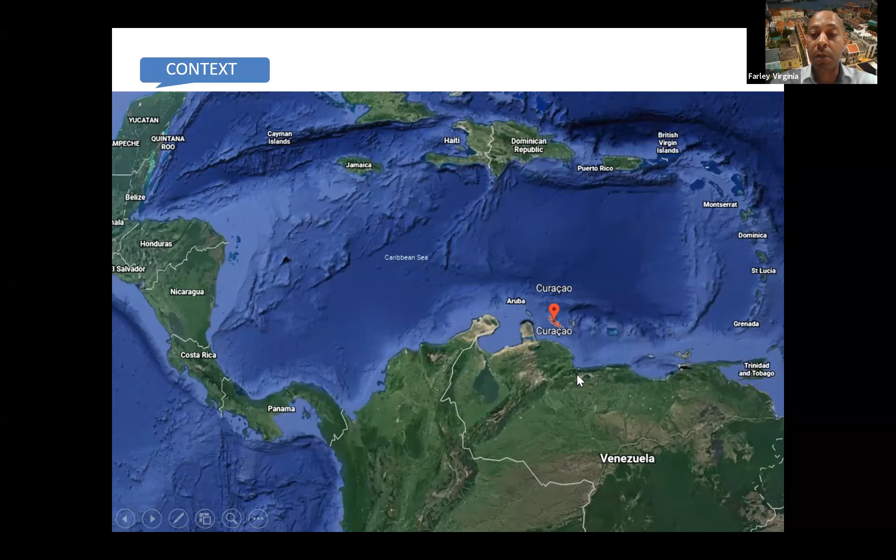Curacao is located north of Venezuela, with our neighbor islands Aruba and Bonaire on the other side. If you look at the Zakito area, it's located at the south part of Curacao. Like I said, you have Otrobanda, and you have Punda, the downtown area of Curacao, so it's adjacent to the downtown area.

This picture you saw before is a combination of real estate development with natural areas like the mangrove parks and lagoons, but it's also an area with a lot of history. One of the main events that happened here is that one of the local heroes of Curacao, called Tula, according to the history books, was murdered, and his remains were thrown into the water at this site. You have statues here too. So it is a very important historic event that took place, and that has a lot of value within the context of this area.

One other important part is the middle of the area, where you have the Aqualectra site. Aqualectra is our water and electricity company. Last Friday they gave a presentation about their ideas for the future, it's going to be very green, with a lot of renewable energy techniques incorporated. They are doing it already, so that's something we're going to incorporate within the development too. But at this moment, they are dismantling this water plant, and they're going to move to other areas within Curacao.

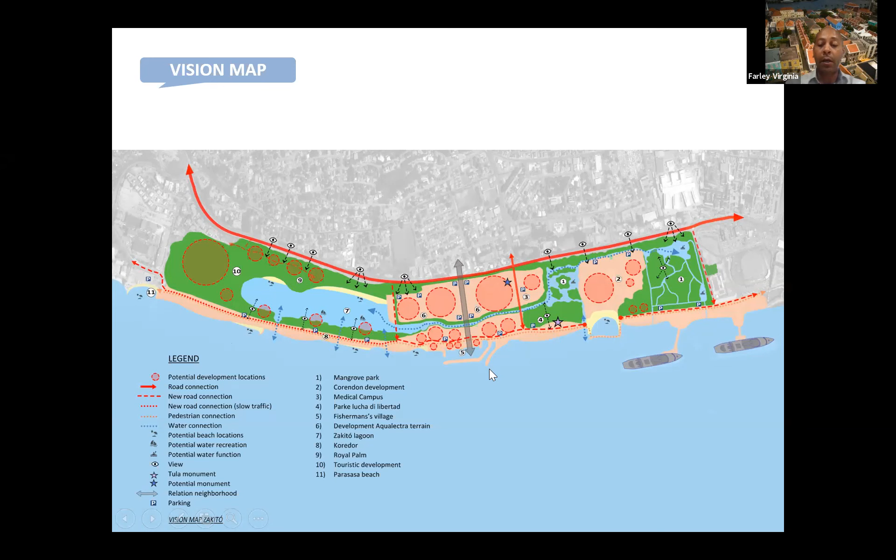Also creating connections between the site here where you have urban development already, but we need a connection with this area. And very important, we would like to have a connection all the way through all the different areas, connecting it to all the existing urban developments already.

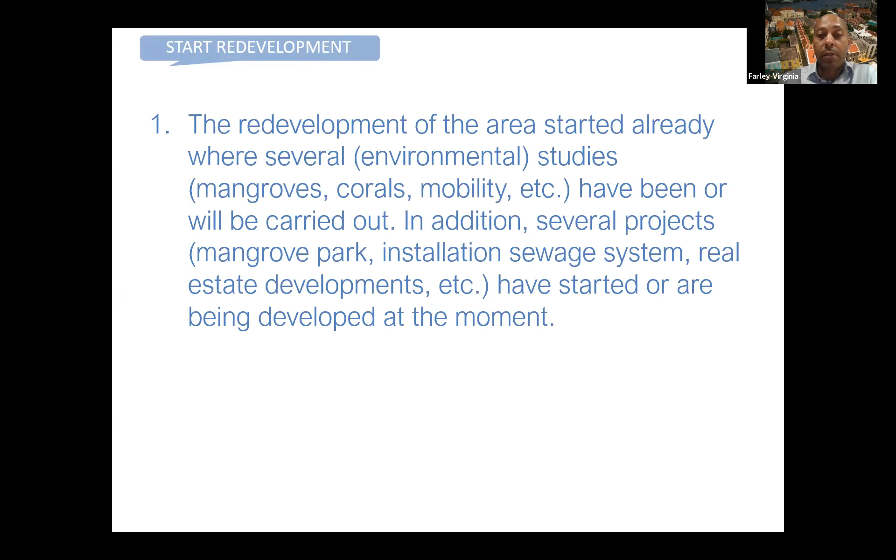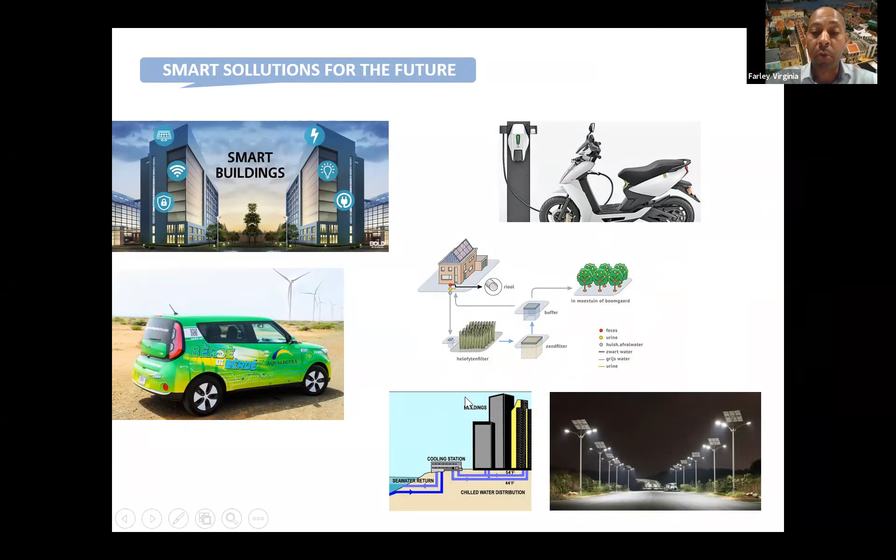This is a site, for instance, where Aqualectra is based now, which is going to be a high density development with smart solutions, recollecting our water and using it for plants. I told you guys already about the cooling of the buildings using water.

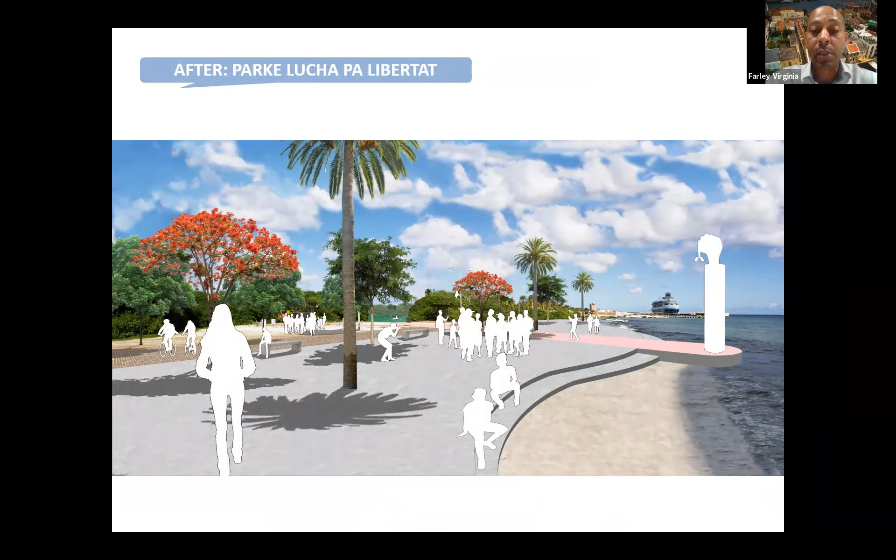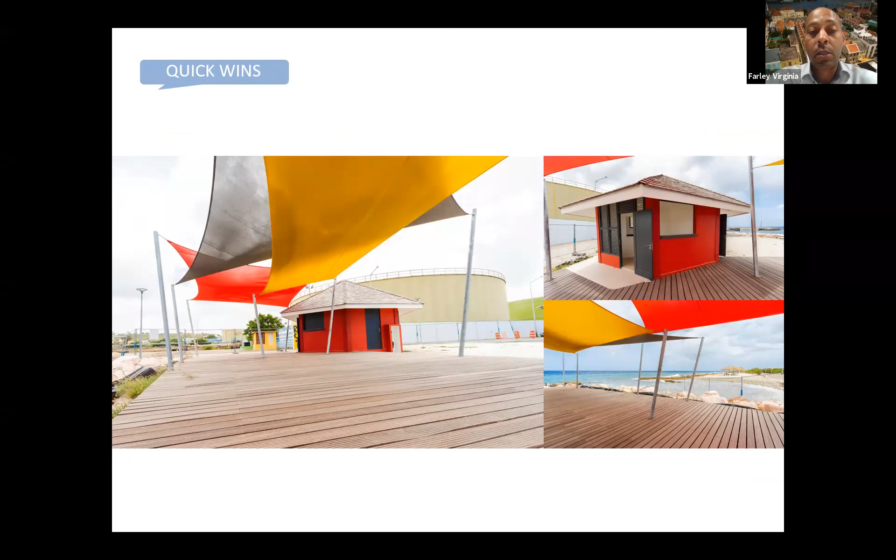Redevelopment of the area where the local hero statue is placed. Fisherman's Village redevelopment also. These are some of the quick win buildings that were there. We redeveloped them.

Aqualectra also installed smart lighting, LED lighting in the areas, like a pilot. And we are working now together with a local plastic recycling company to come up with a pilot for waste bins, where also the different materials can be separated.

This was a presentation.

Yes, indeed. Thank you very much, Farley. You showed indeed a natural area with some development possibilities, and of course we have some challenges in how we can make it as sustainable as possible, but there are a lot of opportunities as you showed. So we are really committed to develop it that way.

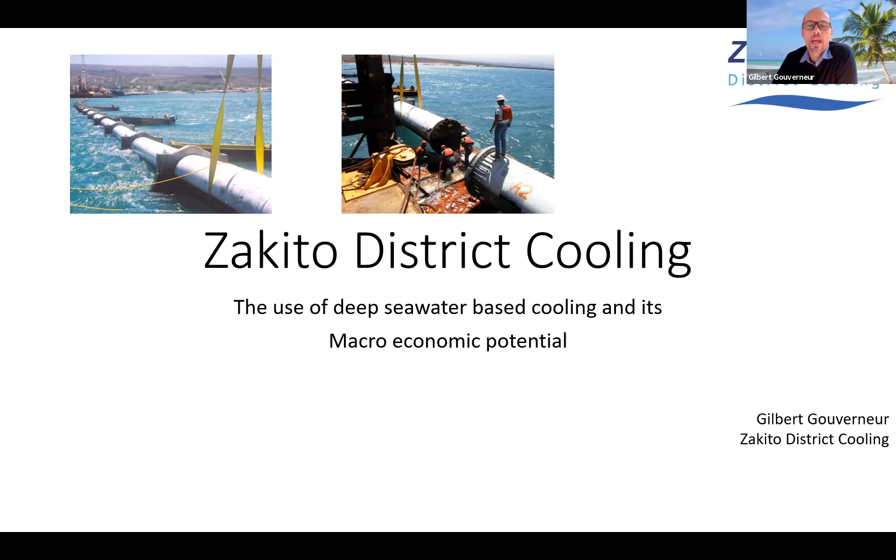Zakitó district cooling is a district cooling system. The basics of that is you produce cooling for buildings in a centralized location and distribute it with a closed pipeline loop. The sources of cooling can be various. It can be conventional cooling systems, rivers, waste heat, but it can also be the ocean, in our case on Curacao and many islands, which we have plentiful of.

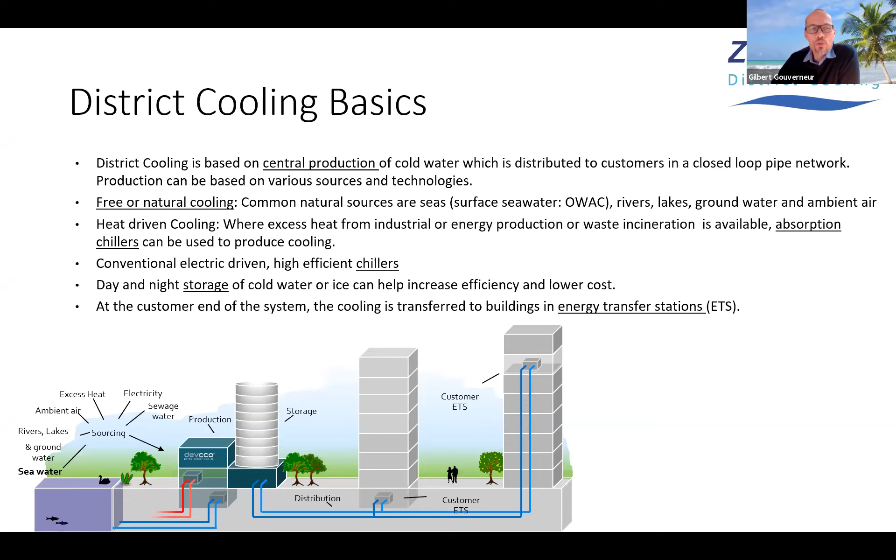And the ocean - you can use the surface water, as our colleague Tony van Sprang will explain with regard to OTEC, but you can also use the deeper sea water for cooling purposes. What we as Zakito Cooling have done is develop a system that looks at the different types of cooling sources available and uses that to optimize a system for the area.

Zulaika also went into the need for us to go green, to be more sustainable, to reduce our pollution and our footprint worldwide. District cooling can contribute to that. Worldwide, it could contribute to a large portion, because 20% of the electricity used in buildings is for cooling, and that's about 10% of the total energy use in the world. So cooling is very important, and for us to cool in a sustainable manner will be very important.

Furthermore, what you see worldwide is that because we're switching to many electrical appliances to substitute fossil fuels, grid capacity becomes a bottleneck, which we have to be very creative with. The result and the solution for that is the use of almost all sustainable and renewable energy sources and solutions there are to mitigate this CO2 problem that we have.

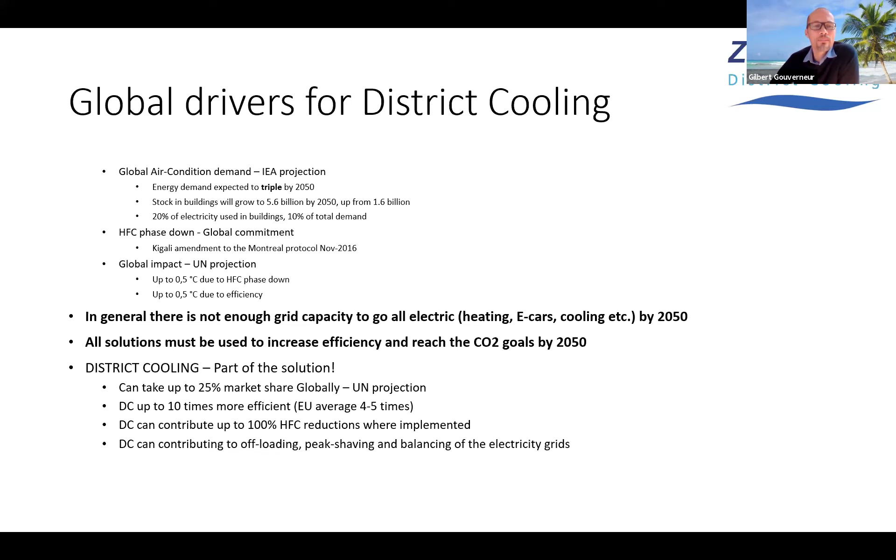Characteristic of deep sea water, of course, is that it's very deep, about 850 meters deep. The water there comes with the ocean currents from the North Pole, through the Atlantic, all the way to Hawaii, taking about 2,000 years to reach Hawaii, and another 2,000 years to get back to the North Pole. The water at this depth is about 5 degrees. It has a lot of nutrients, and it's very sterile. Because of that, besides cooling, it has a very interesting potential for other purposes.

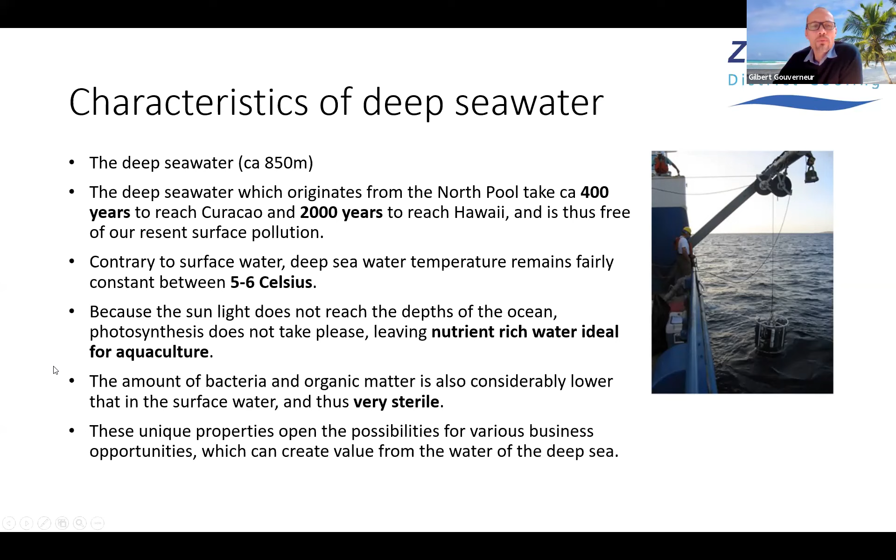Now I'm going to show you guys a short film. One second, how does this work?

How can I? Is everything okay? I need to get out of the presentation for a second. Stop sharing. Yes, I don't have that button. Above, you can see that you can stop the share. Ah, okay, yes, thank you.

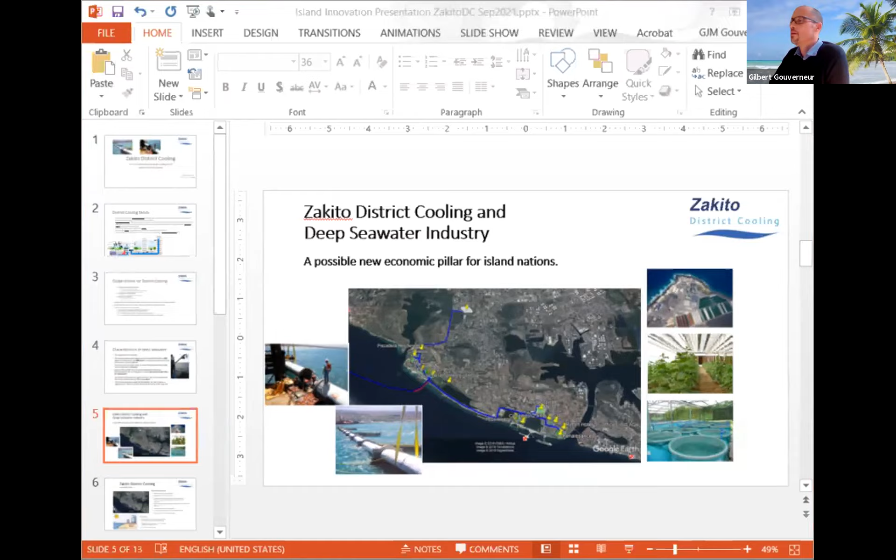Curaçao Wegenbouw Maatschappij, EcoPower International, Deerns Netherlands, Civil Engineering Caribbean, and Devcco Sweden have set up a cooperation to develop the Zakito.

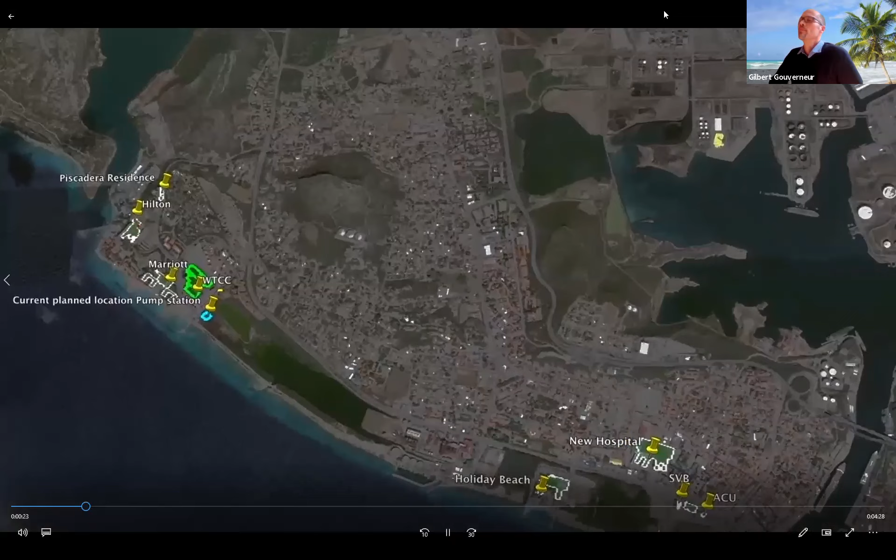There's no volume anymore, is it? Cooling system, and thus provide all the customers with a sustainable, reliable, and cheaper means for cooling their buildings.

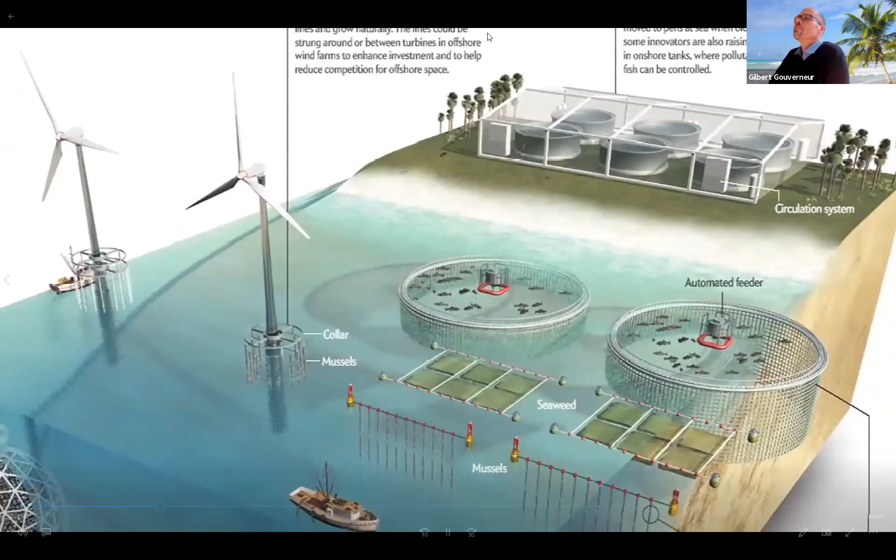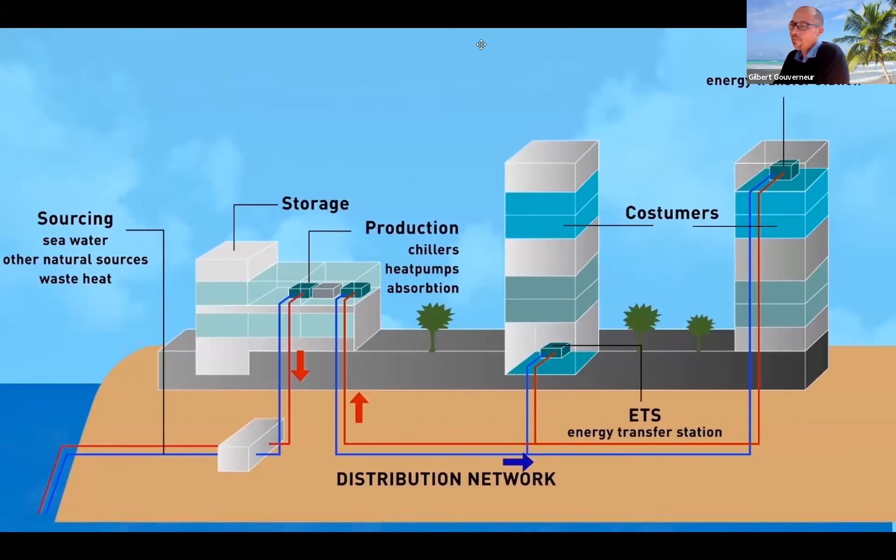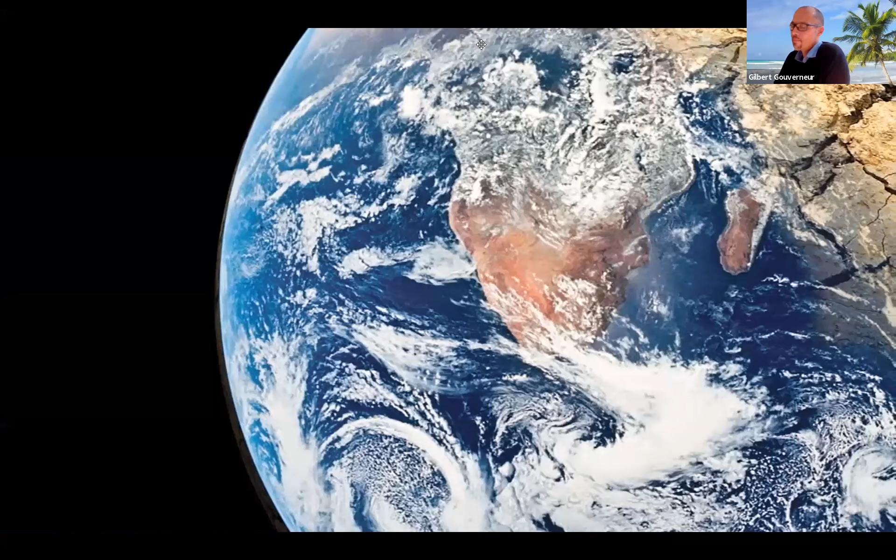Another benefit of the Zakito district cooling installation is the opportunity to use the returned seawater for a deep seawater industry, a possible new economic pillar for Curaçao. The Zakito district cooling system and the subsequent potential for a deep seawater industry can be seen as an insurance for our future energy and food supply, now and for generations to come. Because of climate change, more of the larger countries will have to deal with drier areas and longer periods of drought. The next world crisis will be the food crisis.

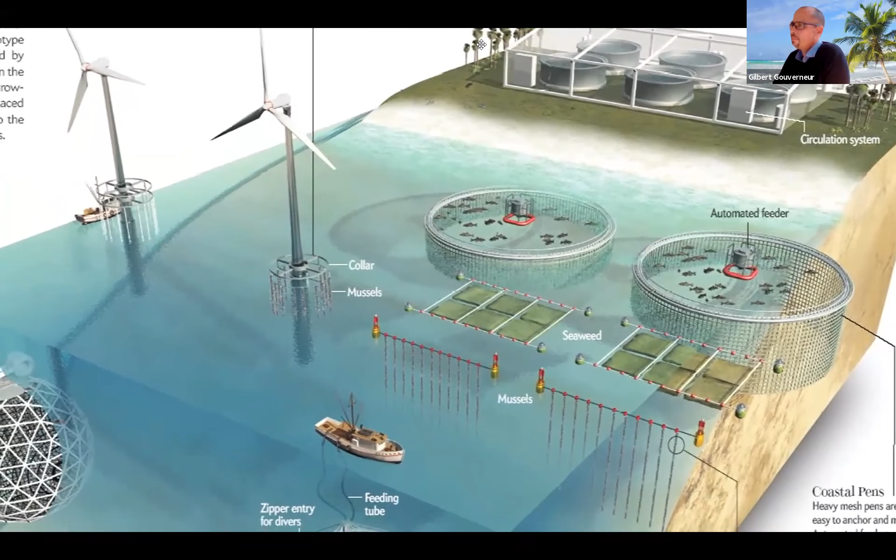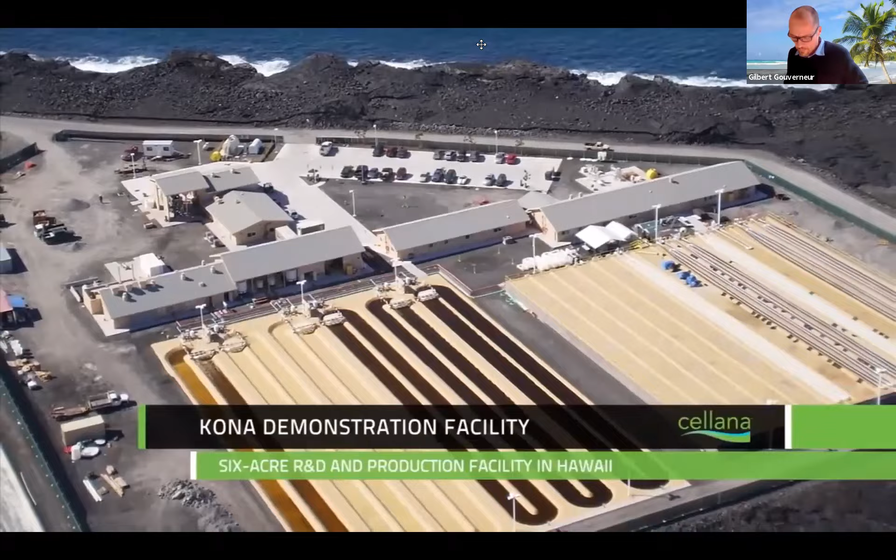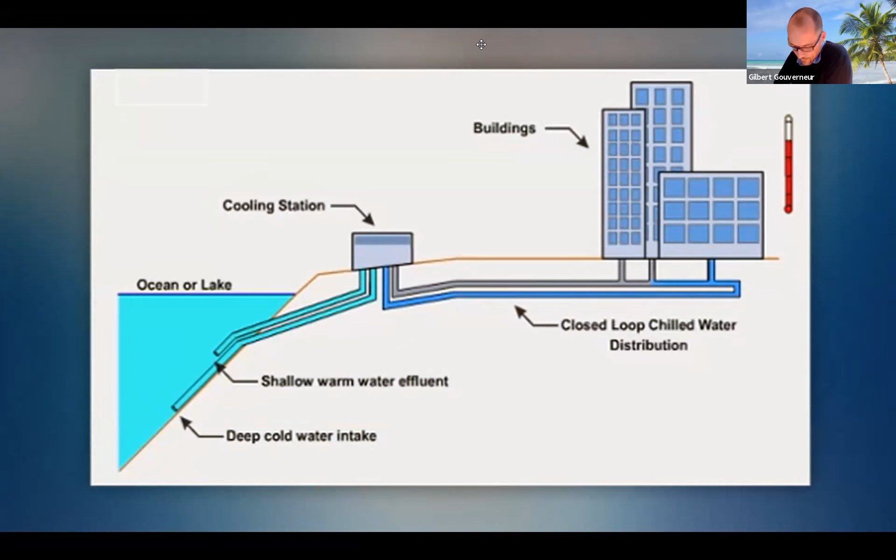Besides for cooling, another way of using the cold seawater from the bottom of the ocean is for activities in a deep seawater industry such as agriculture and aquaculture. Locations where this is being done include Nelha, Hawaii, Japan, Korea, Taiwan, India, and Bora Bora. After the water has been used for cooling buildings, it will still have a temperature of approximately 12 degrees Celsius, which is still cold enough for agricultural or aquacultural use.

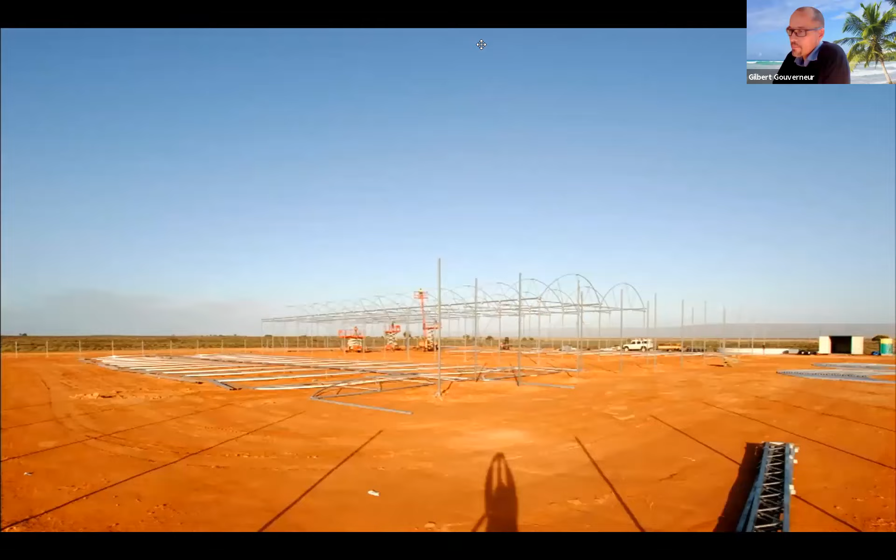A system you could think of using is similar to the Dutch greenhouse system. But instead of heating them, as is done in the Netherlands, here in the Caribbean we would have to cool the greenhouses. An additional side effect of cooling greenhouses in the humid Caribbean climate is free water due to condensation. Fish farming is also made more feasible with this deep seawater because at great depths the seawater is rich in nutrients and sterile, thus free of viruses and bacteria. With this system, we could start producing vegetables, fruits, and fish that cannot be produced in this region at the moment.

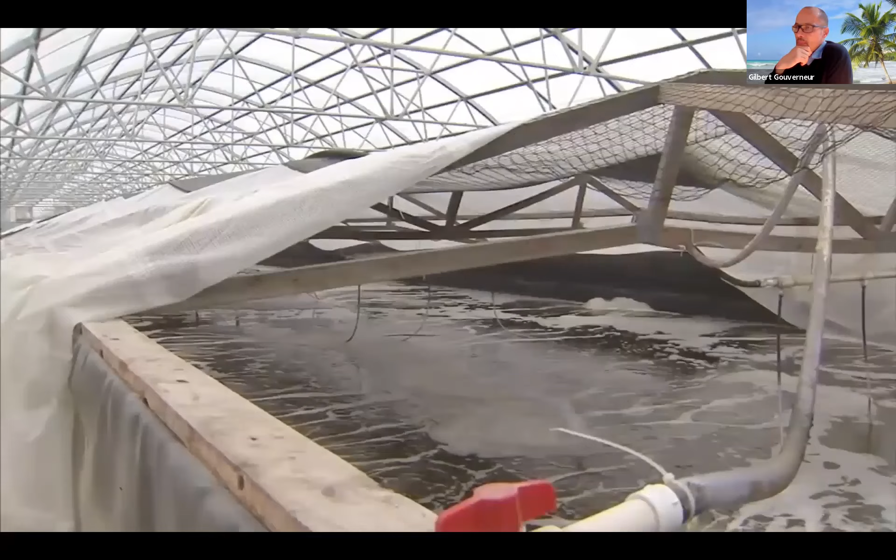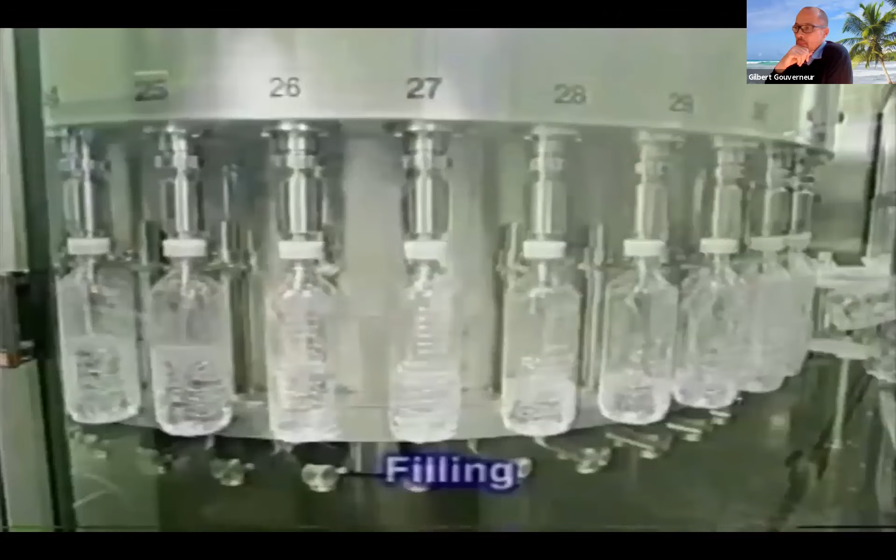We visited Nelha, Hawaii to have a look at their blooming deep seawater industry that has been running for more than 20 years. For instance, there is a shrimp farm that uses deep seawater, sterile and full of nutrition, to produce shrimp that are disease-free for the shrimp industry. There is also a company that takes deep seawater to produce drinking water and bottles it for the Asian market. In Asia, there is a very large market for this centuries-old water, because it has great spiritual value for them. This industry has grown to become the largest export industry in Hawaii, with sales of approximately $140 million per year.

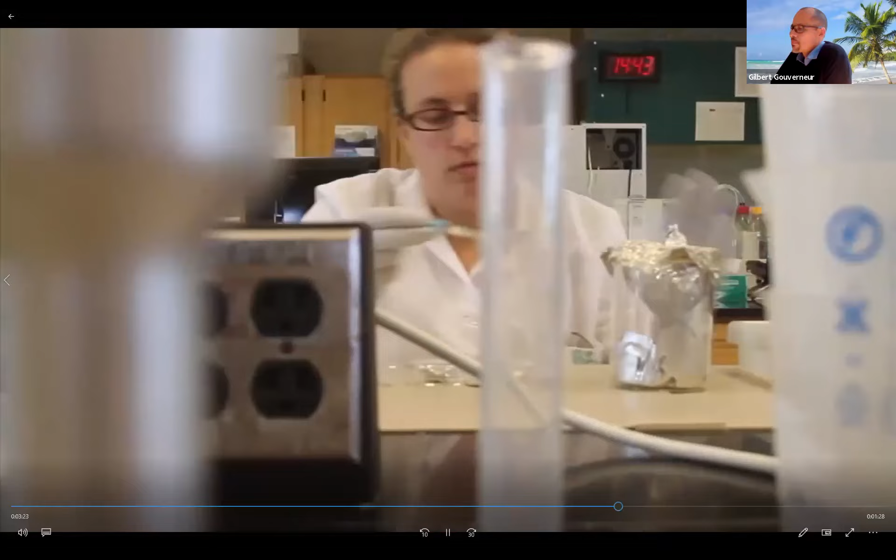In addition, there is the production of microalgae that is used in the medical and cosmetic industry. This industry will continue to grow rapidly because of the ever-aging world population. The deep seawater industry in Nelha contributes to the Hawaiian economy with approximately $90 million per year and has created almost 600 direct and indirect jobs. It also contributes directly to Nelha for the usage of the land and the water, with approximately $5 million per year. In Bora Bora, they use the deep seawater for spa treatments, offering medicinal baths as a skincare method.

With large-scale seawater projects, it will be possible not only to provide reliable hurricane- and tsunami-proof, sustainable, and cost-effective cooling, but also to develop a deep seawater industry, which can generate export earnings and in time provide all the vegetables and seafood needed. Deep seawater technology is a logical option in the journey towards green and more self-sufficient islands, independent of foreign influences like fuel and food markets.

Yes, thank you. Thank you for the technology. It's fantastic.

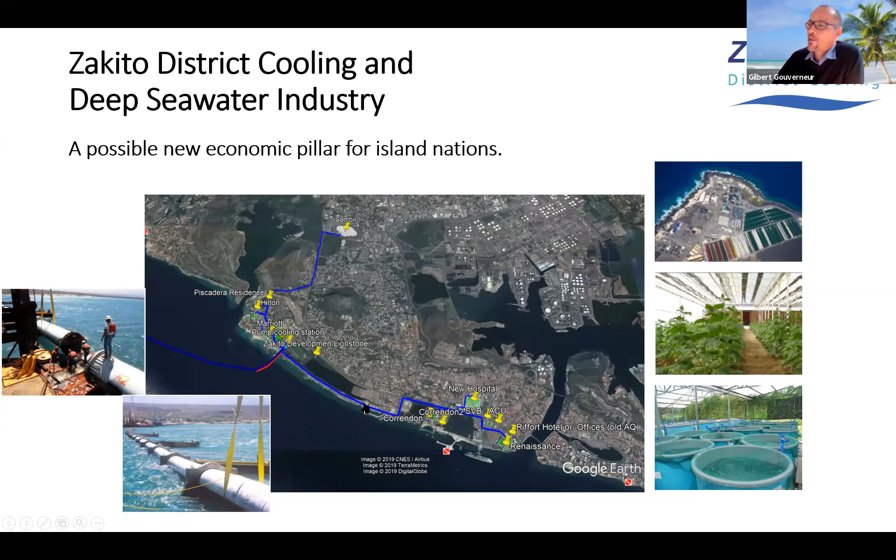So we are developing the Zakito district cooling system. As you can see here, it has a distribution system that will run through the area that Farley Virginia just explained is going to be developed. Basically all buildings projected there can be connected to this future district cooling system, allowing them to have a sustainable cooling system that is independent from fossil fuels, because it only uses about 2% of the energy that conventional cooling systems would use.

The investment of Zakito district cooling is about 50 million. It will have about 10 megawatt capacity. The seawater intake pipe has a length of about 6.5 kilometers, going to 850 meters depth, with a diameter of about 1 meter.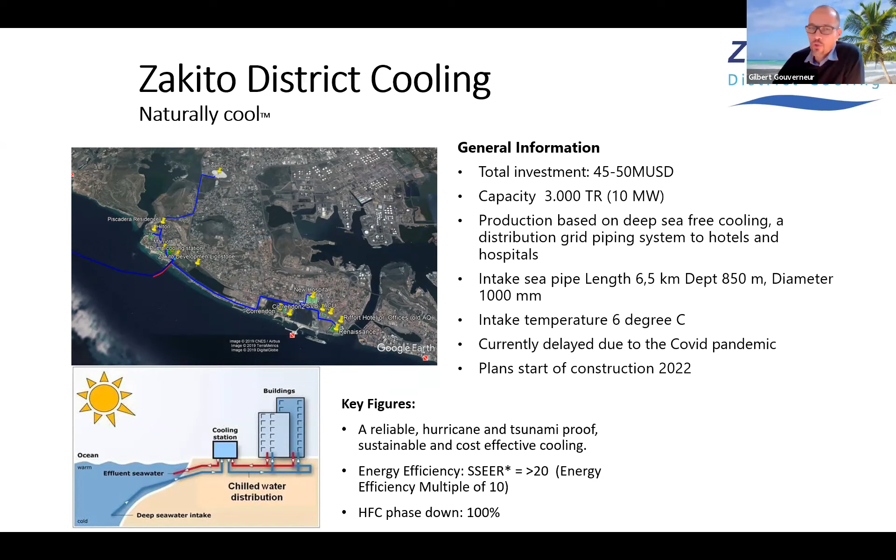Currently, as many projects have had the same problem, the project is delayed because of the COVID pandemic. But behind the scenes, we have been working very hard to get to financial close, and we expect to be able to start construction in 2022, so next year.

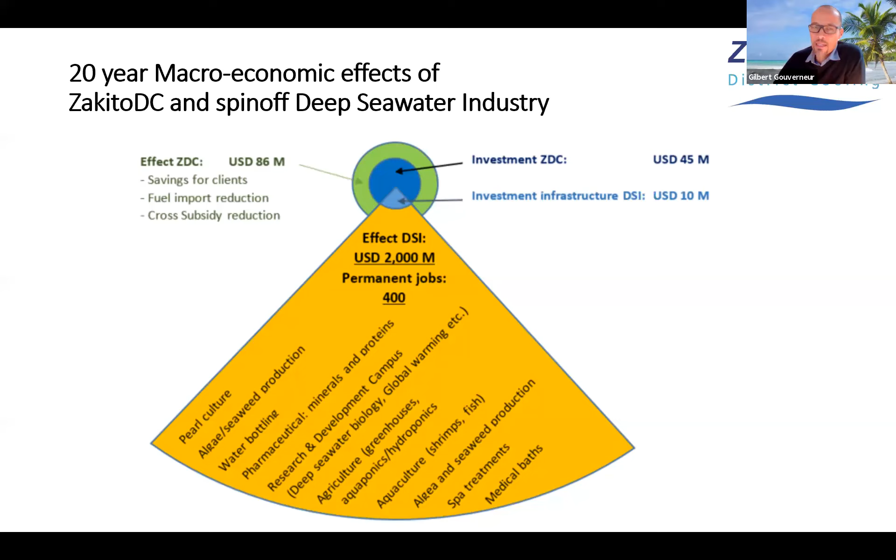But moreover, for the deep seawater industry, you can create an effect of about $2 billion and create also middle and higher level jobs. We expect about 400 jobs that can be created. So the deep seawater Zakito district cooling can be seen as a catalyst for a much larger industry, that is the deep seawater industry, which can then be coupled to the system.

There is a huge potential of this system all around the world. Already in the Caribbean, we see there's about $1 to $2 billion in projects as a potential. It is suitable at all coastal areas around the world because you don't need deep sea water, you can also use the surface water, as Tony van Sprang will show you in a few minutes. So there is a very large potential to make cooling at coastal areas, but also other areas in the world, much more sustainable.

This was my presentation, and I hope with district cooling and deep sea water industry, we can contribute to make this world a more self-sufficient and sustainable place for our children. Thank you very much.

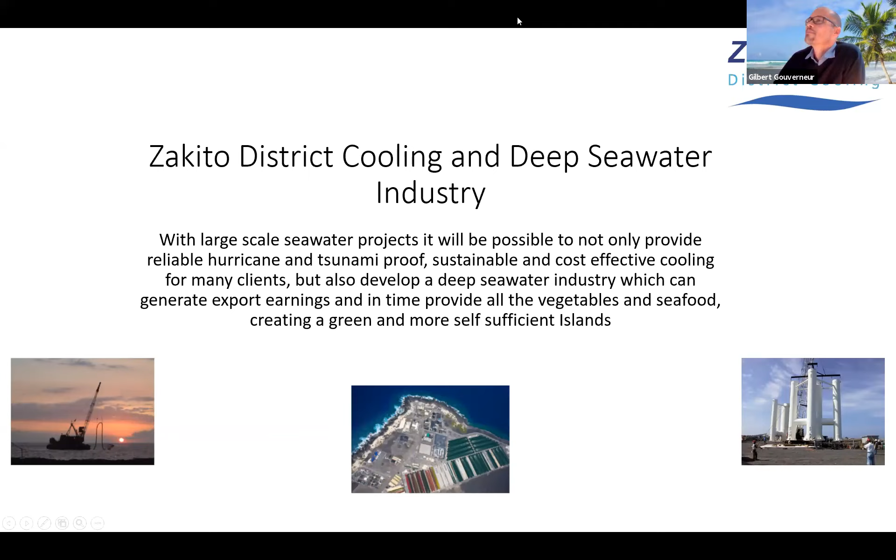Thank you, Gilbert. Like you said, cooling is important for businesses to operate and draws a lot of energy because it produces a lot of CO2, so the alternative energy source definitely helps. Mr. Gouverneur showed that next to the primary benefit, there are also secondary benefits as a result of applying the seawater district cooling system, including the contribution to the economy and job creation. So I believe it's a good system and technique. Hopefully you have learned a lot from this also, and it has intrigued you to look much further into this system.

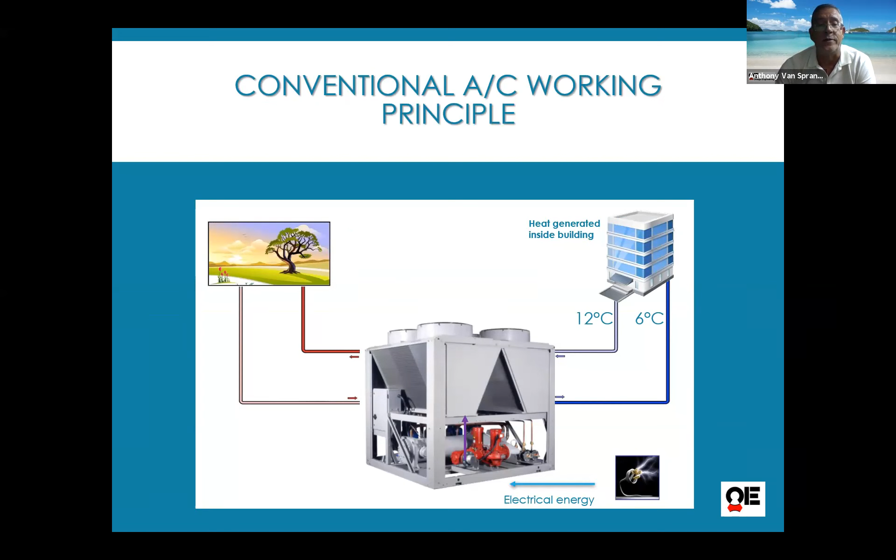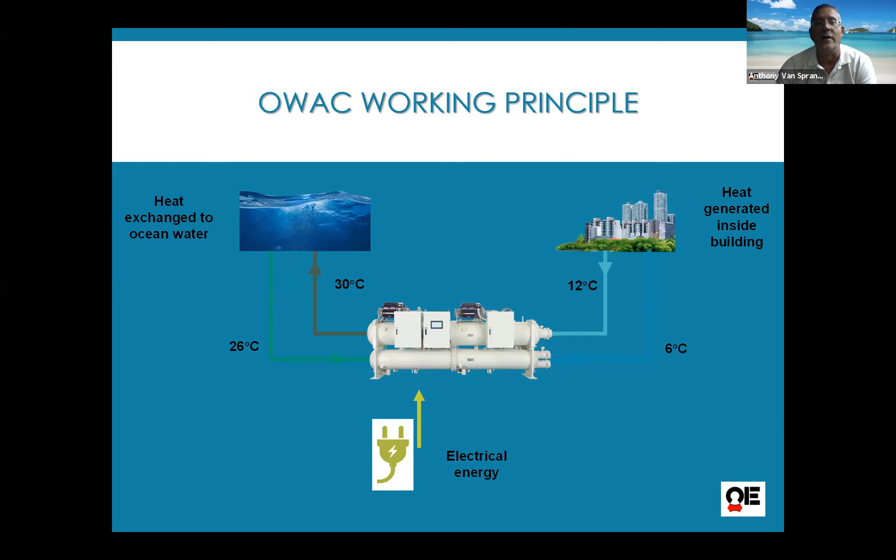So what is OWAC? Well, OWAC is very straightforward. Normally, when you cool a building, you take energy out of it and move it into the outside environment. With OWAC, we do basically the same, but instead of moving it to the air, we move it to the ocean. There's a very good reason why we do that, and we will explain it now.

OWAC is not on the generating side of energy, but on the consumption side. On the generation side, we have fossil fuel, wind, solar, and geothermal energy that is transported through the grid and delivered to the consumer, where it is consumed. A large part of the energy that goes through the grid is consumed for air conditioning.

OWAC reduces the consumption of air conditioning by up to 75%. So with one unit of energy that you would normally use to feed one consumer, now you can feed four consumers.

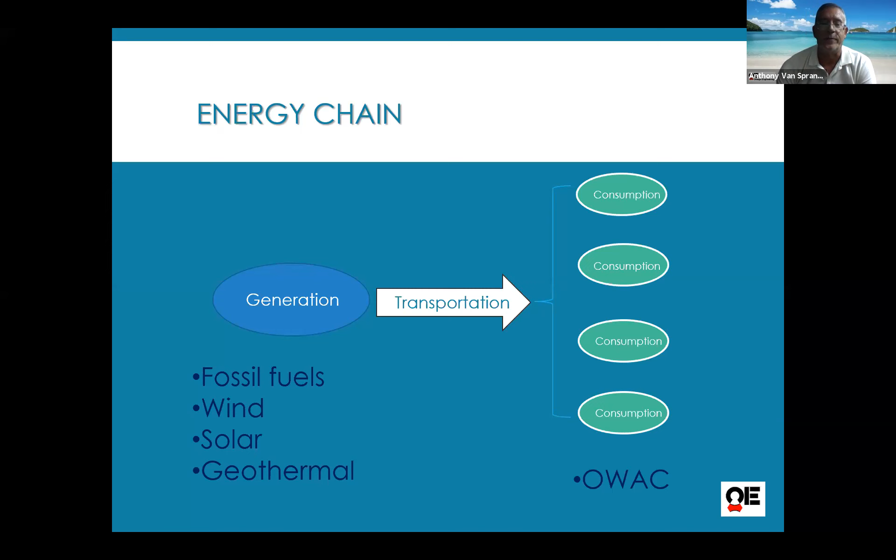So the objectives of OWAC are to reduce the energy cost of consumption. The world trend, as mentioned in the introduction, the IPCC has come out with a devastating report, and every nation, every island in the world will have to conform in the future to a lot stricter regulations than what we've experienced until now. OWAC conforms to that.

We are in support of a low emission strategy for the short and long-term future, to conform to the IPCC. It is a low impact system, low impact meaning for the environment, and it's cost effective. The returns, from a financial point of view, are very attractive in financial models.

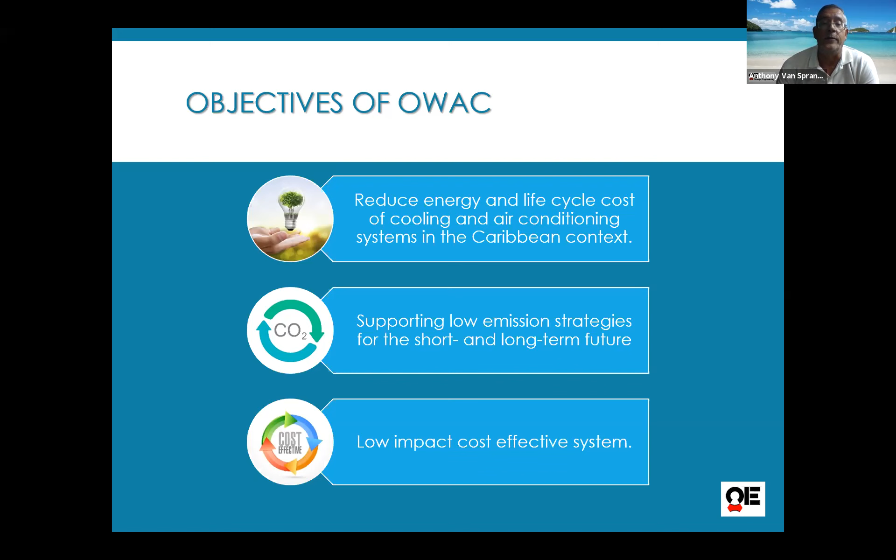So the concept is that we reduce energy by 60 to 80%, in that bracket, compared to regular air conditioning equipment.

The lifespan of the equipment, because it's designed and engineered to work with seawater directly, is 2 to 3 times longer than conventional air-cooled equipment in the Caribbean, where we have salt-laden air that is very corrosive, but the system can deal with that.

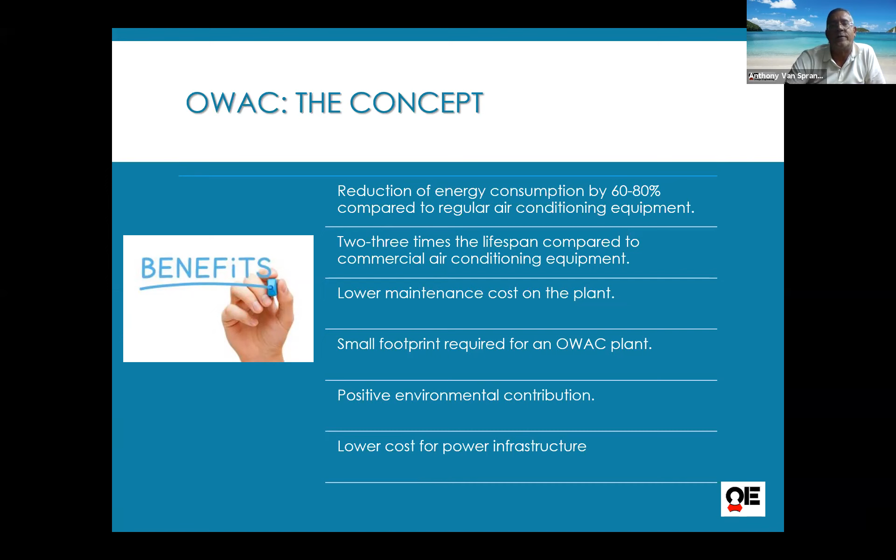So we have lower maintenance cost on the plant itself, a small footprint, and in the end, a positive environmental contribution, and also, last but not least, a lower cost for the power infrastructure. Like I showed before, you can serve a lot more consumers with the same amount of energy, so the grid is not loaded with as much energy transfer as it normally would be.

Okay, in practice, I'll show some pictures of systems we've already put in place. The OWAC system in operation now in Curacao has been running for almost 8 years, and it runs better than we anticipated in our specs to our customer.

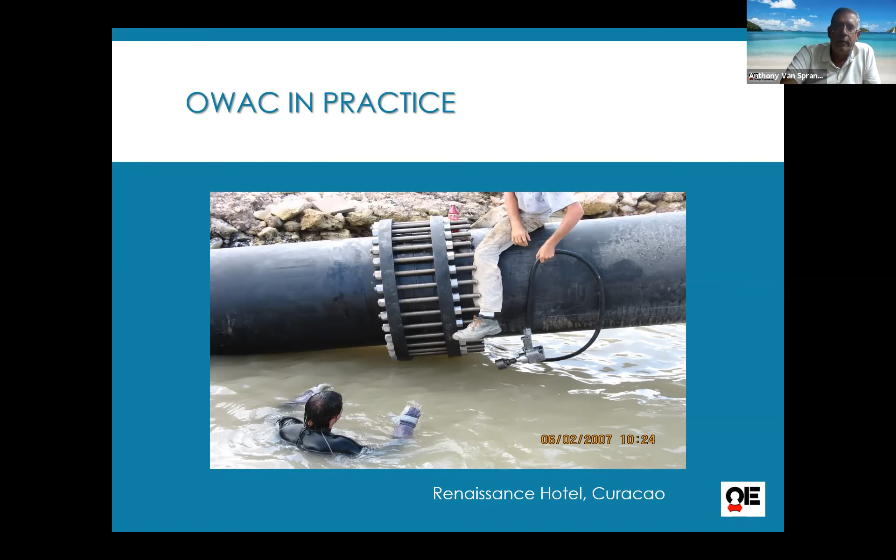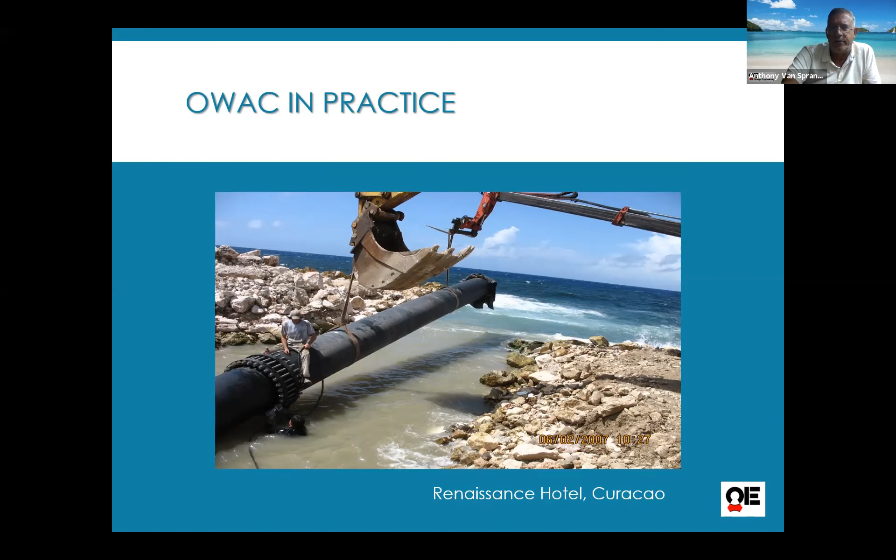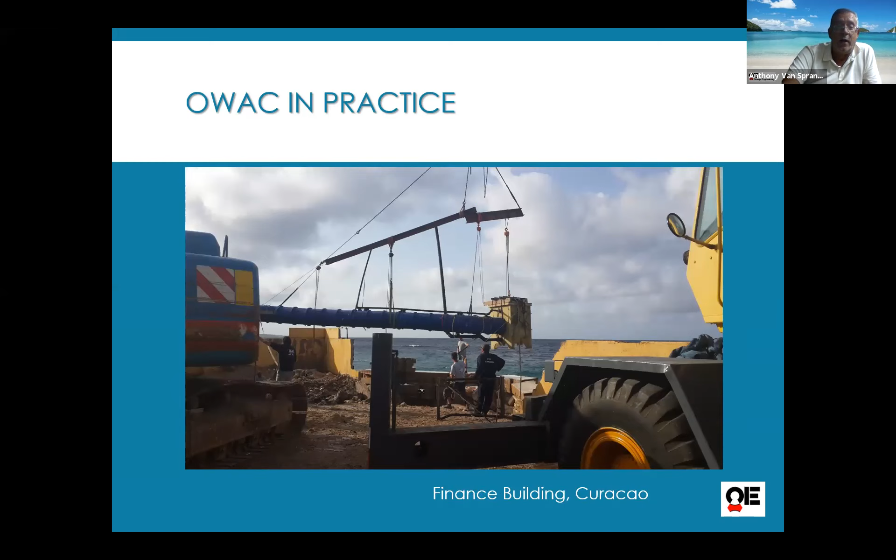I'll go through some pictures showing mainly how we bring the seawater in and what methods we use. This is for a quite big system of 1,200 tons. This is a small system of about 100 tons that we installed. This was our first system, and the performance of this system is amazing. I'll come back to that later in the presentation and show you some figures about it.

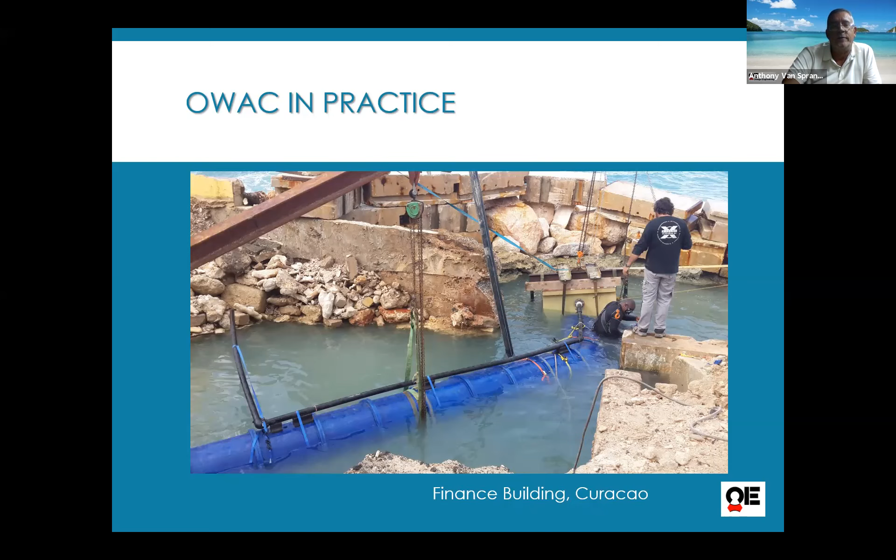So what are the properties of an OWAC installation? It's different from normal air conditioning. You need coastal space for the water intake, but only for the intake and the outflow. The consumer doesn't have to be very close to that intake—it can be further inland or along the coast.

The development of an OWAC system is a little more complex than a standard system, because we have to take way more elements into consideration in the engineering plan. It also has a higher initial cost than regular AC equipment and systems, which can be up to 3-4 times as high.

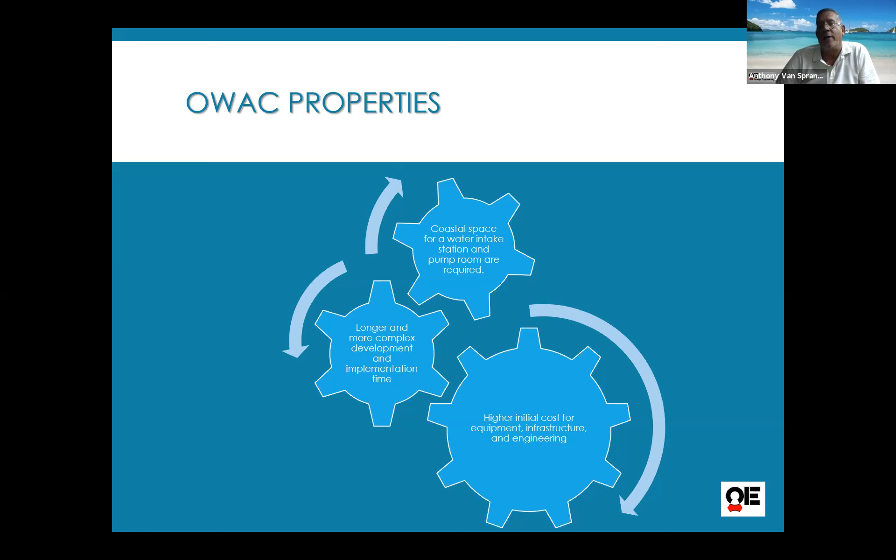A lot of questions we get is, okay, what about the coral reefs? Do you damage anything? Is there any damage? Up to now, we have to say no, because we don't have to go far into the ocean, and the coral reefs normally have a depth bracket.

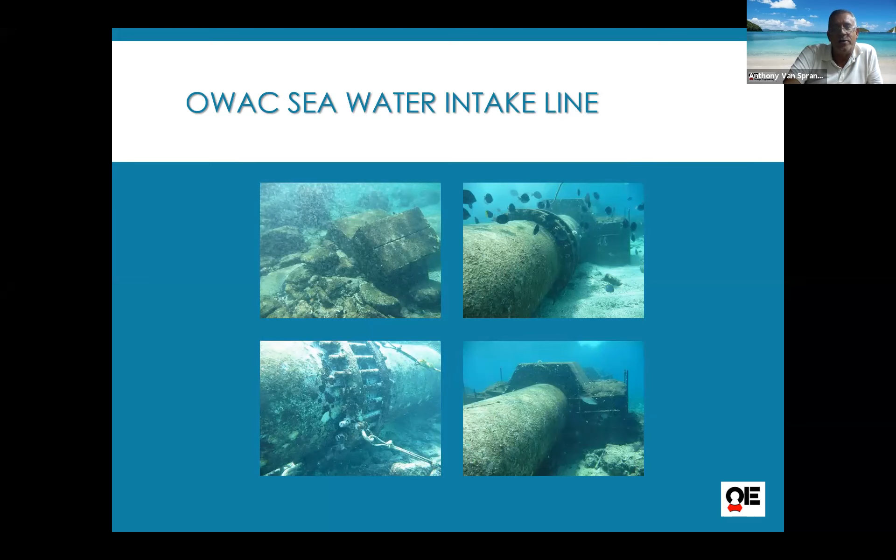Here are some pictures. This is a 90 centimeter pipe that we installed to the first plateau, and you see it's only sand here. As a matter of fact, the ocean life considers the pipe as a shelter to protect them, as you can see.

Only you have 1 minute left. Okay, I'll go very quickly.

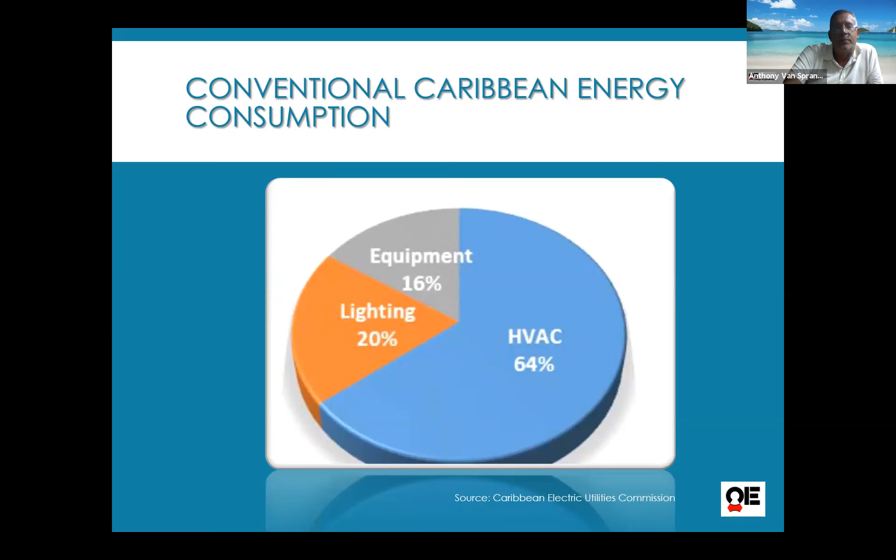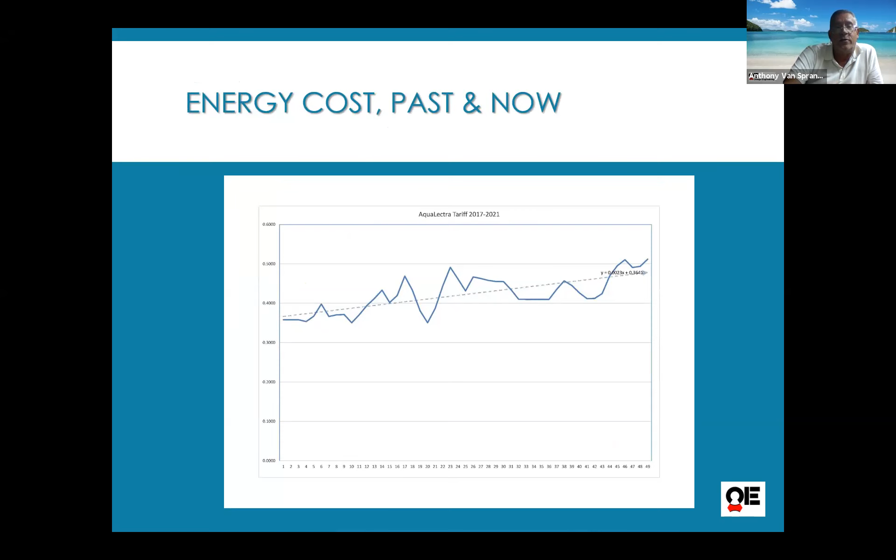AC is the biggest consumer in the Caribbean. This is the average by the power companies in the Caribbean. Energy prices are on the rise here in Curacao, and also in general, if you project it over 20 or 30 years, there will be quite a cost involved with that.

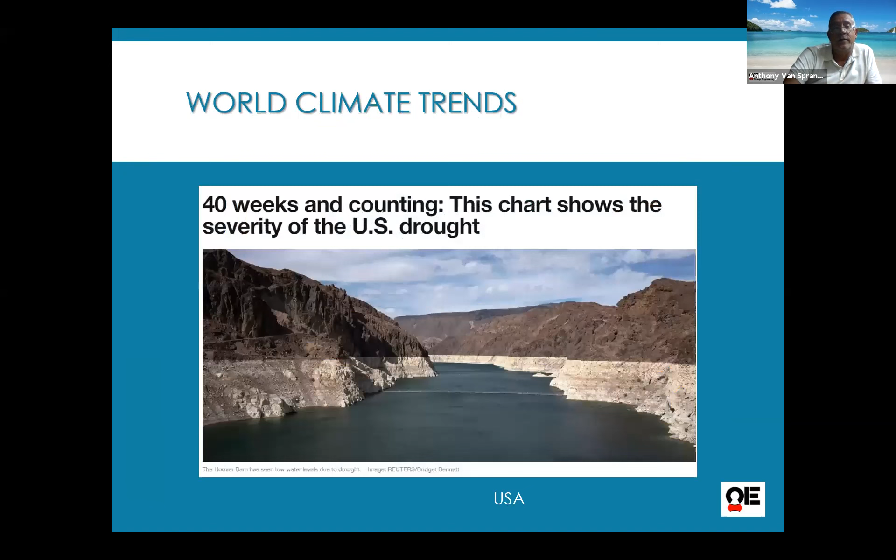I will go. If you look at the future, what is happening now in the world with the weather—droughts, fires, floods—is all related to climate change, and the IPCC has a few years ago already given guidelines where to look for to have some control.

A very important point of OWAC is that you can develop eco-responsible solutions, come close to zero climate impact. It's affordable, sustainable, and therefore also future-proof. The technology is future-proof.

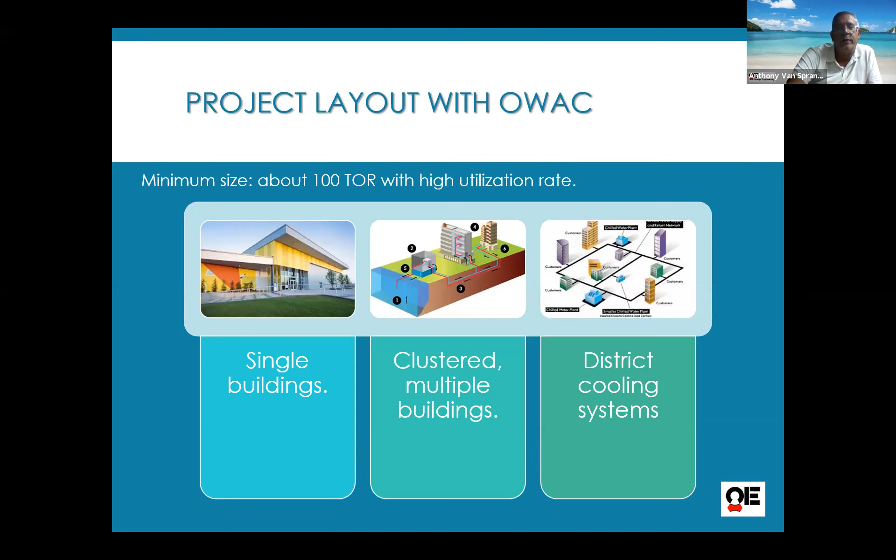I'll skip this. The layouts of OWAC can be for a single building, clustered multiple buildings, or district cooling. It's a very flexible system that can be scaled up to your need. The minimum is about 100 tons of refrigeration—that's the minimum size, and the maximum is undetermined.

Thank you, this was what I had to add to this presentation. Yes, very nice, thank you Tony.

Like Tony said, he explained the OWAC was created by Omega Engineering, and he is a proud winner of the Regional Energy Globe Award in 2019. Congratulations. You see that the OWAC focuses on and has an objective to reduce energy consumption, something I mentioned in my presentation also as part of our national energy policy. He also explained the concept and went on to show the application of the OWAC in practice, indicating that this surpassed their expectations, and that is a good sign. So we are very grateful that Tony explained this all to us.